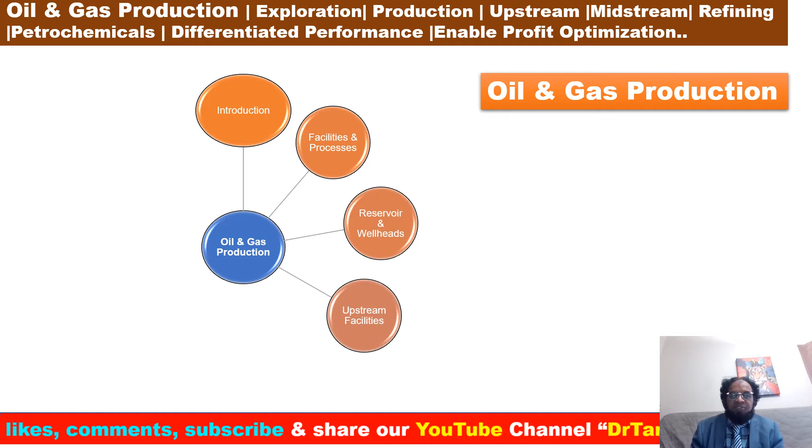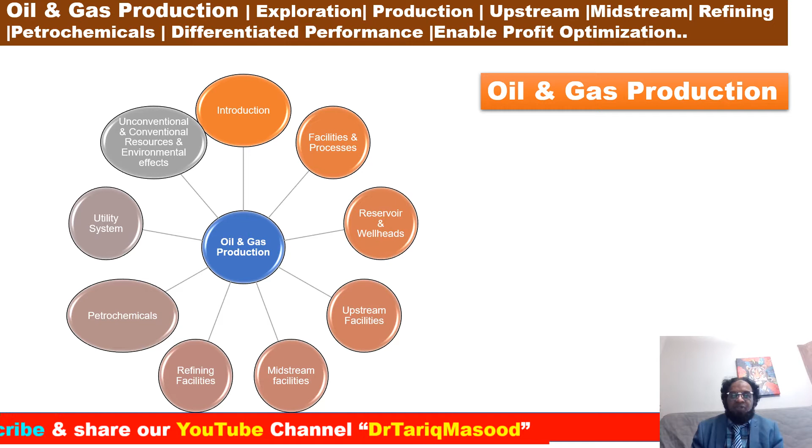Okay, oil and gas production. Introduction, facilities and processes, resources, wellhead management system, upstream facilities management systems, midstream facilities management system, refining facilities management systems, petrochemicals, utility systems. Now we are discussing unconventional, conventional resources and environment effects. What is the ultimate goal? Shaping clean and sustainable global energy delivery. Planned to deliver more than 300 lectures in the next couple of years.

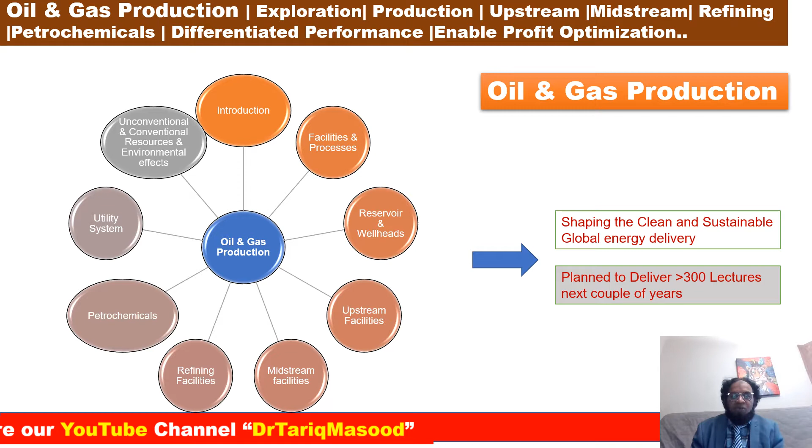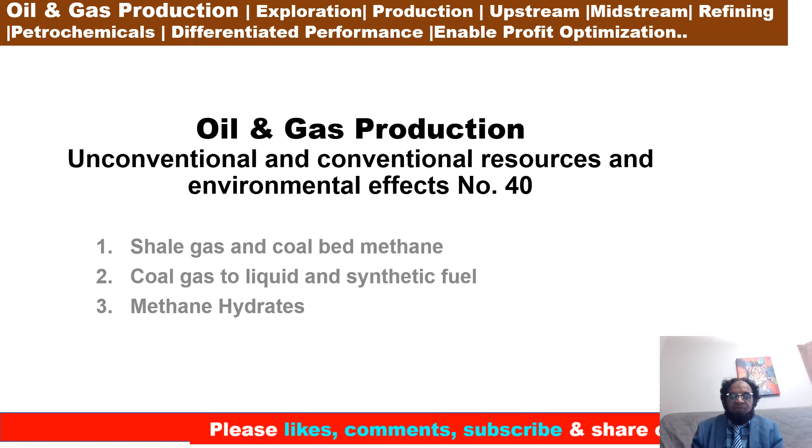Okay, oil and gas production, conventional and unconventional resources and environment effects, lecture number 40. Today we have planned to discuss shale gas and coal bed methane, coal gas to liquid and synthetic fuel, and methane hydrates. Key takeaway points from lecture number 40: shale gas, coal bed methane, coal gas to liquid and methane hydrates.

Shale gas and coal bed methane. Oil shales are also becoming an important source of shale gas, and some analysts expect that this source of natural gas can supply half of the gas consumption in the US and Canada by 2020. Shales normally do not have the required matrix permeability for the gas to be produced, and in the past, gas could be produced only from source rock with significant natural fracturing. The natural gas comes from decomposition of shale oil and is held in natural fractures, some in the pore spaces and some adsorbed onto the organic materials.

Recently, there have been strong advances in extraction technology, which uses a combination of horizontal wells and hydraulic fracturing in a way that maintains fracturing and flow of gas much better than before. Even so, production typically requires a high number of wells with limited lifetimes, so continuous drilling of new wells is required to maintain output. Methane is a potent greenhouse gas, and emissions from leaking capped wells and fractures are a potential problem due to the large number of wells. This form of production is different from oil shale gas, which is produced by pyrolysis, meaning heating and hydrocarbon decomposition of mined oil shales.

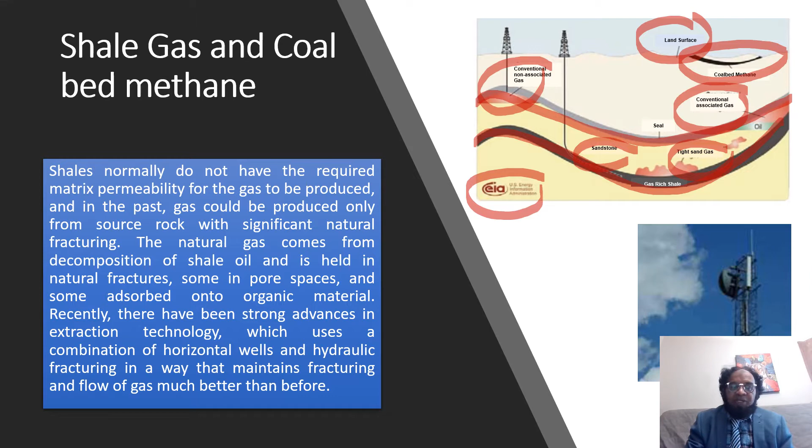Coal gas to liquid and synthetic fuel. Coal is similar in origin to oil shales but typically formed from the anaerobic decay of peat swamps, relatively free from non-organic sediment deposits, reformed by heat and pressure. To form a 1 meter thick coal layer, as much as 30 meters of peat was originally required. Coal can vary from relatively pure carbon to carbon soaked with hydrocarbon, sulfur, etc.

It has been known for decades that synthetic diesel could be created from coal. This is done first by creating water gas as a synthesis gas by passing steam over hot coke. The reaction is endothermic and requires heating, which we're going to discuss in my next slide.

So if you want to know more about the synthesis gas, please follow up on my other lectures 34, 35, 36, 37 about the synthesis gas.

Okay, it has been known for decades that synthetic diesel could be created from coal. This is done first by creating water gas as a synthesis gas by passing steam over a red hot coke. The reaction is endothermic and requires heating. So in the chemical reaction here, the carbon reacts with steam, so it will produce hydrogen plus carbon monoxide (C + H2O → H2 + CO). More hydrogen is produced in the water gas shift reaction.

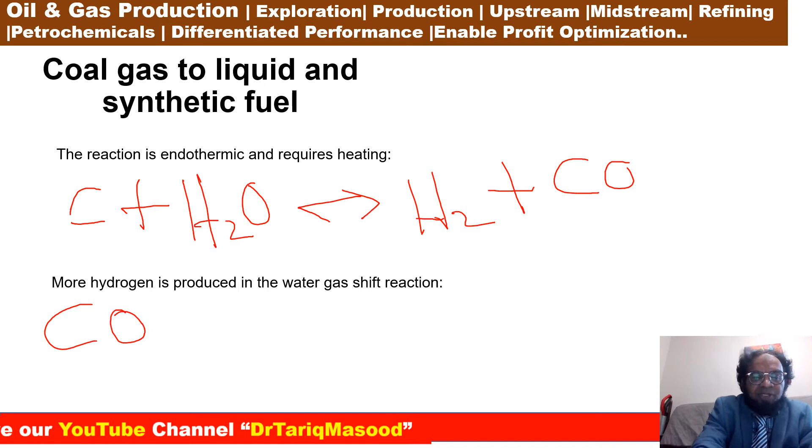What is a shift reaction? There are two types, HTS, high temperature shift converter, and LTS, low temperature shift converter. So the carbon monoxide reacts further with steam, and it produces hydrogen and carbon dioxide (CO + H2O → H2 + CO2). The carbon dioxide is easy to remove through an absorber. This process is used in the ammonia plant.

Often two stages are used: a high temperature shift converter, HTS, at 350 degrees Celsius with catalyst iron oxide promoted with chromium oxides, and a low temperature shift converter, LTS, at 190 to 210 degrees C with catalyst copper on a mixed support composed of zinc oxide and aluminium oxide. These synthesis gases are then used in the Fischer-Tropsch process, which I'm going to discuss in my next slide.

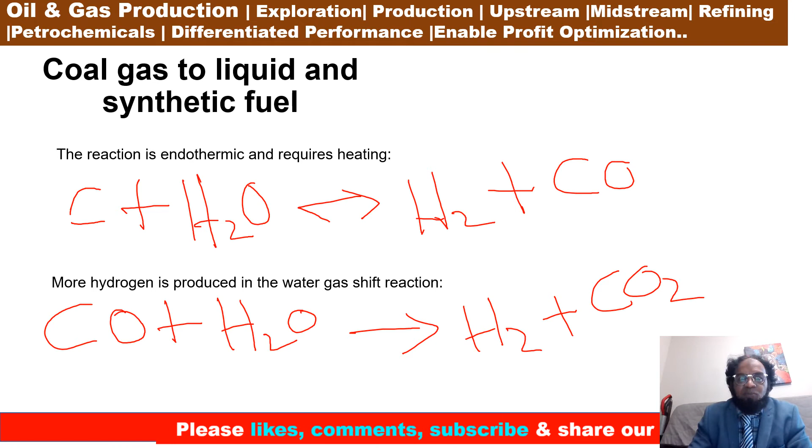This process runs at a pressure of 2 to 4 MPa with iron catalyst. The high temperature process at 350 degrees Celsius will yield diesel fuel quite similar to normal diesel, with an average carbon number of 12 and a certain content of unwanted aromatics. The low temperature process uses a cobalt catalyst and a temperature of 200 degrees Celsius and yields a pure synthetic diesel composed of alkanes with a carbon number of 10 to 15 and an average carbon number of 12.

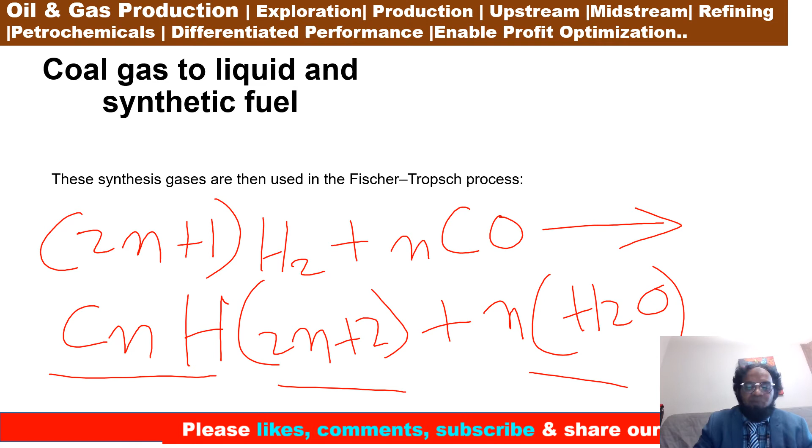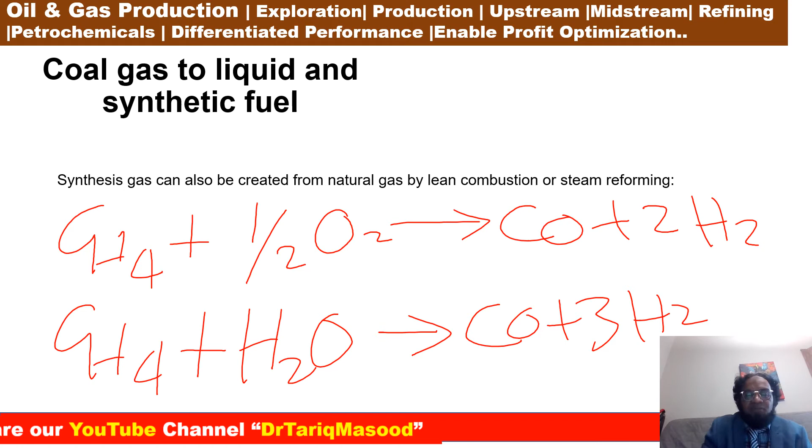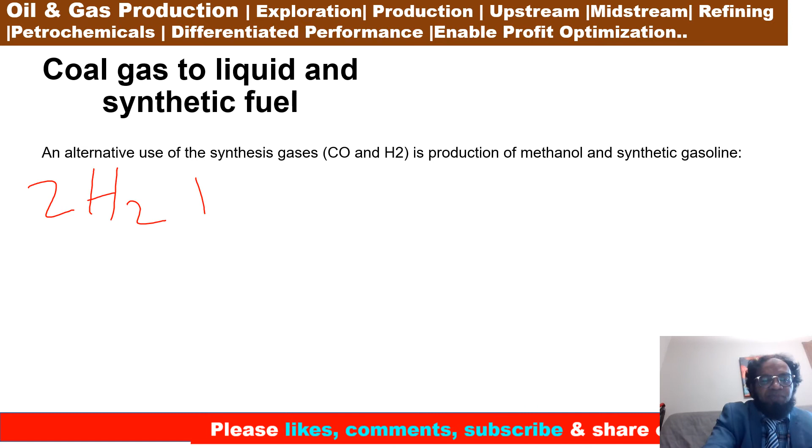Coal gas to liquid and synthetic fuel. An alternate use of the synthesis gas, carbon monoxide and hydrogen, is production of methanol and synthetic gasoline. First, 2H2 plus carbon monoxide will produce methanol, CH3OH, methanol synthesis. Then the methanol is converted to synthetic gasoline in the Mobil process.

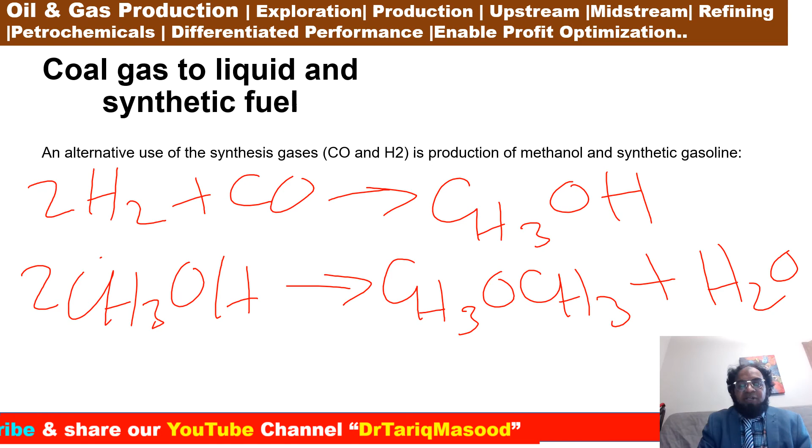2 CH3OH is converted to CH3OCH3 plus H2O, dehydration to dimethyl ether. The second stage further dehydrates the ether with zeolite catalyst to yield a synthetic gasoline with 80% carbon number 5 and above. This is my last slide.

Methane hydrates. Methane hydrates are the most recent form of unconventional natural gas to be discovered and researched. These formations are made up of a lattice of frozen water, which forms a sort of cage around molecules of methane. Hydrates were first discovered in permafrost regions of the Arctic and have been found in most of the deepwater continental shelves tested. The methane originates from organic decay at the sea bottom under high pressure and low temperature. The hydrate is heavier than water and cannot escape.

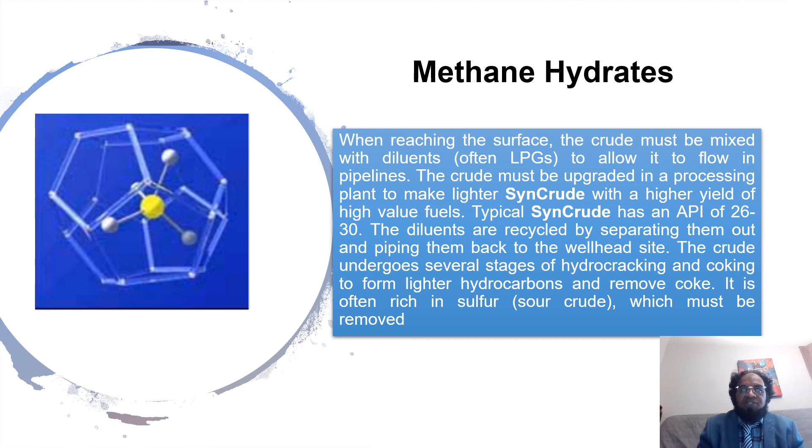Research has revealed that this form of methane may be much more plentiful than first expected. The estimates range anywhere from 180 to 5,800 trillion cubic meters. The US Geological Survey estimates that methane hydrates may contain more organic carbon than all the world's coal, oil, and conventional natural gas. However, research into methane hydrate is still in its infancy stage.

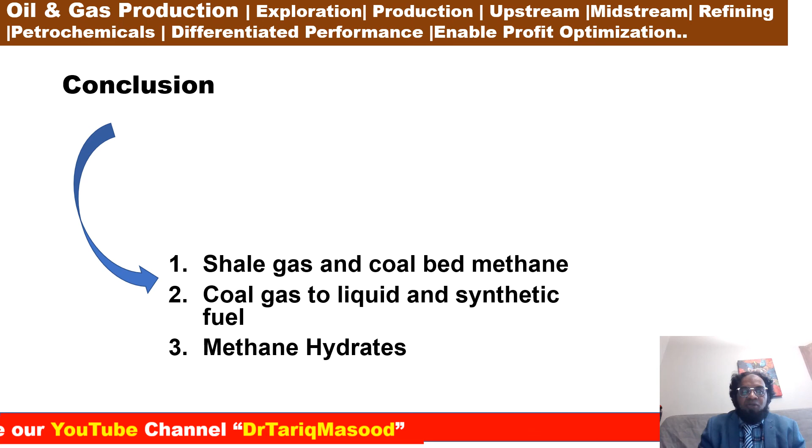Conclusion. Today we have discussed shale gas and coal bed methane, coal gas to liquid and synthetic fuel, and methane hydrates. In my next topic we are going to discuss biofuels and hydrogen.

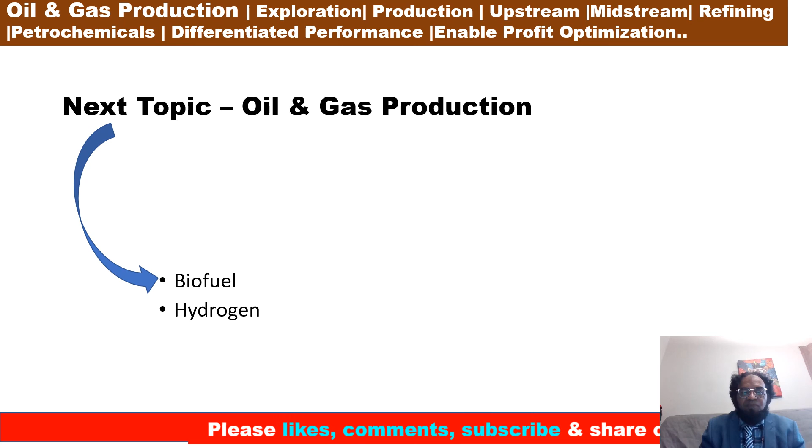References here: Qatar Petroleum, Doha, Qatar; OGDC, Pakistan; World Energy Outlook 2013; US Geological Survey; US Department of Energy; Schlumberger Oilfield; International Energy Agency; Wikipedia; Oklahoma State Oil Fact Sheets; No. 16, the story of oil in Pennsylvania; the Air Liquide gas encyclopedia; the natural gas from wellhead to burner tip. These are the references.